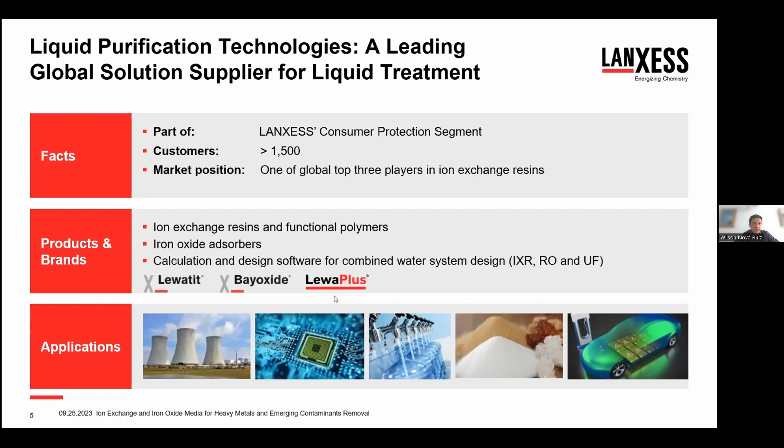I think with that we can go to the next part - let's talk about the problem, what we are dealing with here. Let's start with a very hot topic we've been talking about for the last 5 to 10 years, which is PFAS. PFAS is literally raining these days. We were in a workshop for drinking water a couple weeks ago with EPA - they are going to come out with a new rule we'll talk about, at the end of this year, so next year a lot of people are going to be very busy trying to figure out what to do with this.

According to a couple of studies, it's not safe to drink rainwater anymore as it used to be in the past. Rain and also snow melt cause PFAS and other contaminants to leach through the soil and groundwater, basically contaminating the surface water as well.

Depending on some key risk factors, we need to consider things like precipitation rate, what kind of soil type we have, how much of the contaminant is retained in the soil, and specifically what PFAS species we are dealing with. In the rule, they're basically speaking about 6 different species, but there are more than 200 species being tested these days all over the place. So it's a very complex problem, and it's something we have a solution for as well.

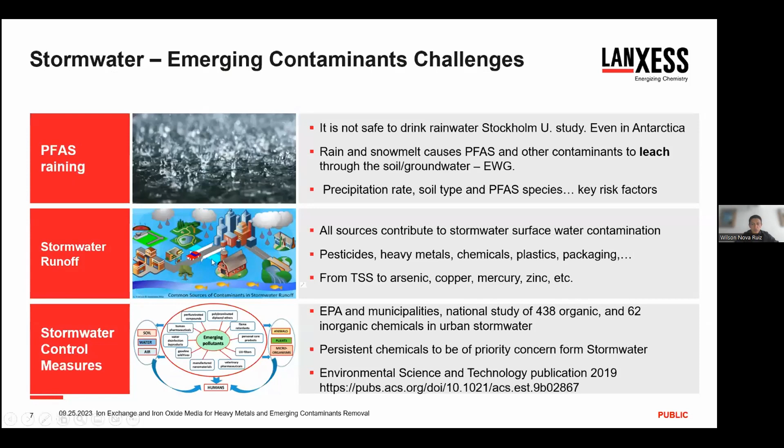But one of the key words here is emerging pollutants or emerging contaminants, because there are some substances of concern for the soil, for the food, for the health of humans and animals and plants, and even the microorganisms. Not only in the water, but then in the soil and even in the air. Like, for example, PFAS is actually something that can contaminate the air as well. So just to have some kind of idea on that.

Sometimes it's a very easy, or let's say simple, treatment system that can take up these contaminants. Like, for example, if you're in a clean neighborhood and you have these kind of retention ponds, you can actually take care of most of the problems.

However, this is not always the case. As we discussed, any stormwater coming from mines, coal plants, or chemical plants can have many different kinds of contaminants. But even this simple retention pond is something that is risky. As you can see, it's not something that you can actually swim in or fish in, but is something that is really like a dangerous or hazardous waste kind of retention site.

This is something that a lot of people are dealing with these days, and we just need to measure and see what is in the contamination. So we say the characterization of the water is the basics to think about any other solution.

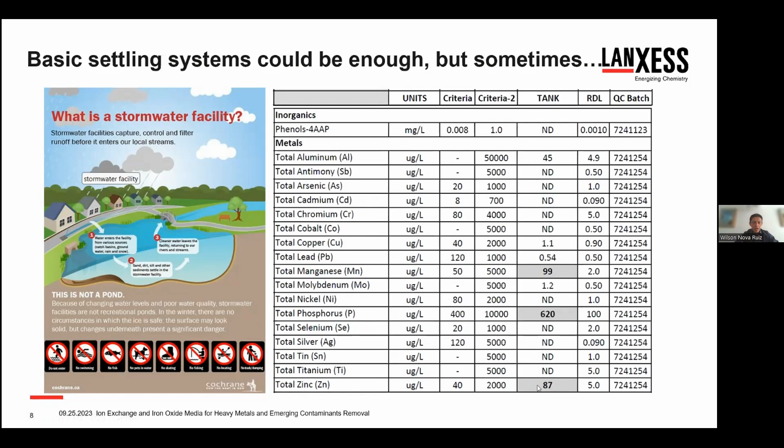And then with that, we can think about what to do because, for example, in ion exchange, we have solutions for manganese. Phosphorus is something that you can actually treat with Bayoxide. And then zinc, there are selective resins that can actually remove the zinc. So there are solutions for every single contaminant. Not all of them, but we have a lot of solutions for that.

Since we are a chemical manufacturer, let me talk a little bit about how we actually sell and what we supply. We supply ion exchange resins. We basically manufacture them. We go from the very raw materials.

We produce the beads, as you can see here, that can be heterodispersed, like in this case, or monodispersed, like in this case. And then these resins that we put in several vessels in order to take care of the contaminants. So the bead, or the ion exchange, is going to have a functional group, usually a type of amine when it's an anion exchange system. Or then we have a polymer matrix, which is usually styrenic most of the times, but we also have acrylic resins. We have some morphology that has to be considered, like gel or macroporous, for example.

Then we also have cross-linking, how much of the structure is actually in the bead able to be, let's say, physically stable over the operation of the ion exchange system, and also how the resin is going to swell and shrink as you load it and regenerate it, depending on the case. That is actually going to determine the operating capacity. I'm talking about the cross-linking still, because the operating capacity is what is actually giving you the capacity of the system in order to take care of the problem.

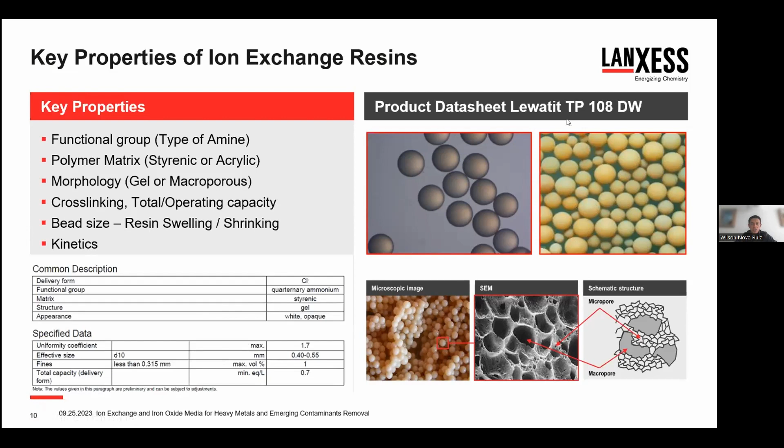So this is some of the basic information we have in the data sheet. And here you can see some of the representation, how these beads are actually formed. And this example is for the TP 108 DW, which is a resin that we sell for PFAS polishing or removal.

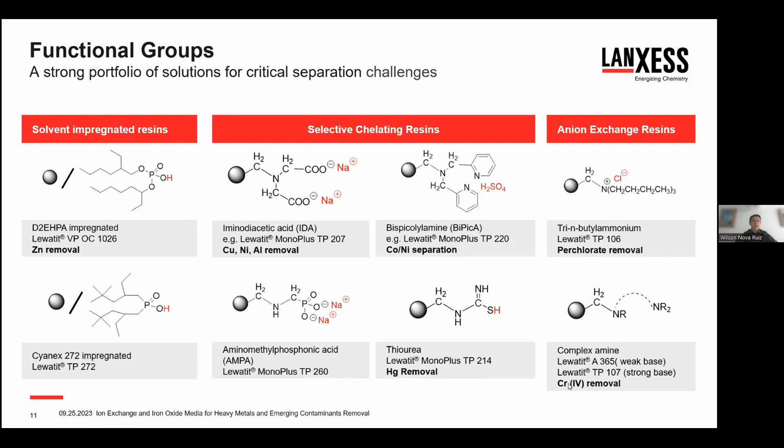From stormwater - this is another way to show how different resins, here in the columns, are going to work for different contaminants in the rows. This is a nice table you can actually use for quick reference. And this is another one, a little bit more detailed on what kind of contaminants you have and what kind of resin you can use.

And of course all of them are different. The good news is that we understand very well each one of them, and we can absolutely provide the necessary support to design the systems and find the right solution for you, depending on what kind of contaminants you are dealing with. There are many different options and problems and challenges that we have a solution for.

Okay, let's talk a little bit about the PFAS regulation. Coming back to the PFAS problem, this is the norm that is going to be issued by the end of this year, and this is kind of confirmed.

EPA is pretty sure they are going to be on time. What I heard a couple of weeks ago is that the draft of the rule is already discussed and is already ready for the administrator review. This is going to happen in the next two months, October and November. Then by December we will have a final rule for PFAS. It's going to be basically taking care of these two, PFOA and PFOS, up to 4 ppt, parts per trillion, or nanograms per liter, which is very, very low.

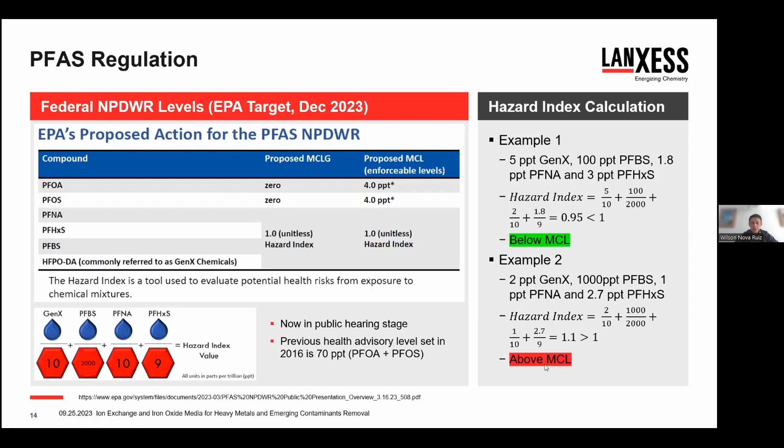So if you get less than 1, then you are below the MCL, you are good to go. But if you are above, then you have to have some kind of treatment in order to reduce and get below the MCL. That's why we want to bring it up, because it's a very hot topic, and we have a couple of solutions for that, both for drinking water and industrial water. Questions about that we can take as well.

A couple of slides just to tell you about a couple of solutions we have. The first one is the Lewatit TP108DW, DW for drinking water. This is the very highly selective PFAS removal resin that we have.

Not recommended for regeneration. This is something that is usually used once through. These resins can go for 100, 200, up to 300,000 bed volumes. So it's a very high capacity and very selective resin for PFAS.

And is approved for drinking water as NSF 61. There is a new product that we just launched a couple months ago, and this is for PFAS as well, but it's a regenerable version. So you can think about wastewater or industrial systems where you need to regenerate the resin because the loading is going to be very high.

Let's say in drinking water, you are always in the range below 100 ppt, and you need to get below 10 ppt. But in industrial cases, you can be in the ppb levels, which is thousands of ppt or thousands of nanograms. And then you need a more robust system with regenerable options, and we have that as well.

There's another one, which is Lewatit MP62WS. It's a weak basic anion, and it's basically for organic species, including PFAS, but also other problems that you may have in the stormwater runoff. And this is a very regenerable resin, very easy to regenerate as well.

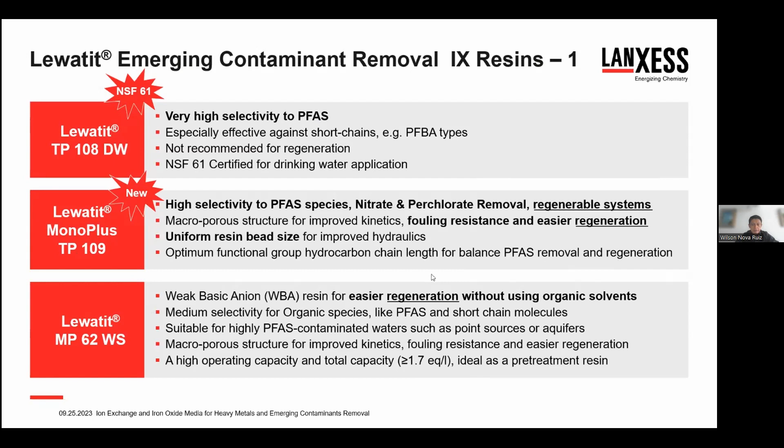It's macroporous, so the structure is a little bit bigger than these two, so that allows the kinetics to be better, and also the regeneration to be more efficient. Capacity is quite high, about 1.7 equivalents per liter. We'll see a couple of examples on those resins as well when you build the systems.

There are 3 more, and with this I stop talking about ion exchange. Basically, TP107 that is very used for chromium removal. We sell that here in the US. Can also be used for PFAS, for bulk PFAS removal. It's an acrylic; the other resins we just discussed were styrenic.

But this one is particularly interesting because it's another polymeric structure, but which provides a much higher capacity, 2.4 equivalents per liter. So it is NSF certified as well for drinking water, but could be used in wastewater, not a problem.

We have the two chelating resins here, TP207 and TP214, and these resins are very, very selective. In this case, for example, you can see you can remove selectively copper, nickel, zinc, cadmium, lead, even chromium and manganese, and also is used for cobalt removal.

Easier regeneration, is macroporous, good capacity, two equivalents per liter, and it's high cross-linking. So it's very robust, very resistant, physically stable, and very resistant to oxidizing.

The TP214 is a very specific one, which is very effective for mercury removal. We sell that in many, many systems, but also for precious metal capturing. So if you happen to have a runoff or a stormwater that is full of these precious metals, you can recover them with the TP214.

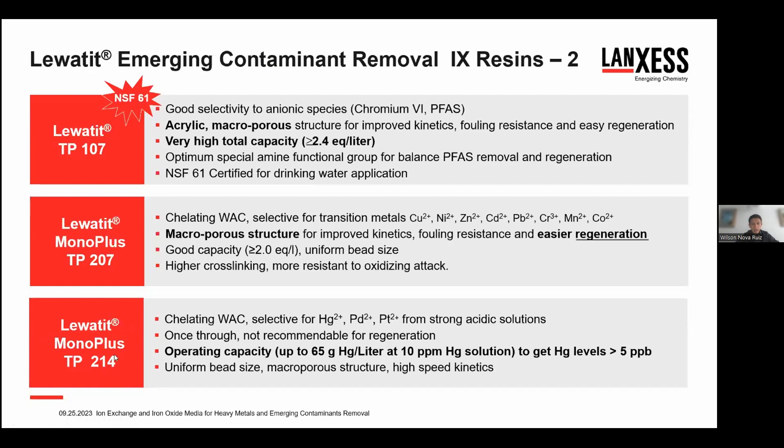Let's talk a little bit about Bayoxide. Bayoxide EIN20 and EIN30 are industrial versions for, let's say, water treatment. And the main target for this media is arsenic.

We sell this resin for arsenic removal globally since many years ago, and we have a big market share on that. But for some contaminants, you can actually use that, like, for example, small concentrations of heavy metals like copper or zinc, and actually phosphorus can be removed with that. Silica is something that we can target with this media as well.

What else? Selenium is something that you can remove with this media. Again, in small, low concentrations, because it's basically a polisher media that we sell in many different areas. As I said, it's basically iron oxide.

If you think about this media, it's basically very similar to granular activated carbon. So whatever you design and you think about how to design with GAC, you can absolutely think in the same way with Bayoxide. It's very similar in terms of design, and we are going to talk about that as well.

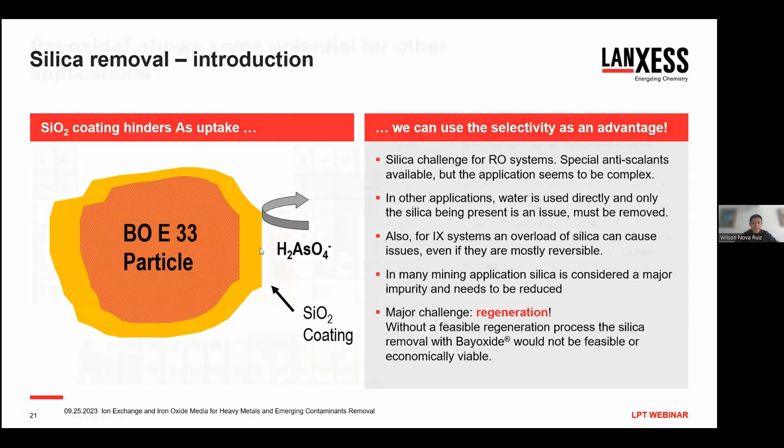And there are a couple of other metals that you can target, again in small concentrations, low concentrations. You can remove them using this media because it's a very good adsorber.

And we can actually use it for household once-through applications, and it's being applied for some cartridges, for example for drinking water. But keep that in mind - if you have a system that is temporary, not high concentration, that needs to clean up, this media can be a very good solution: effective, easy to handle, easy to design, easy to operate.

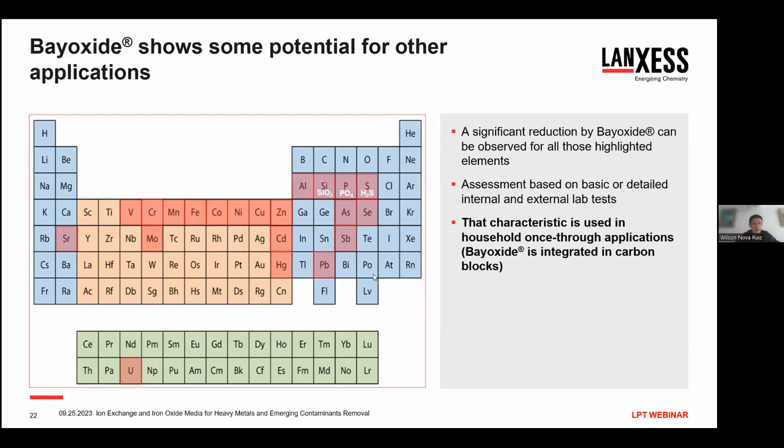Okay, that's more or less what we have for today, but let's talk about how to actually apply those two kinds of media in the solutions for removal.

So usually the resins and ion exchange resins are used in lead-lag systems. Basically the lead is going to take care of the bulk removal, and then you have a polisher or a lag vessel that is going to make sure you're always under the target that you have.

But there are some characteristics of the water that you need to keep in mind. Not any water can be treated that way. Usually you have some kind of pre-treatment in order to make the best out of the ion exchange. And of course, we have several studies for specific substances.

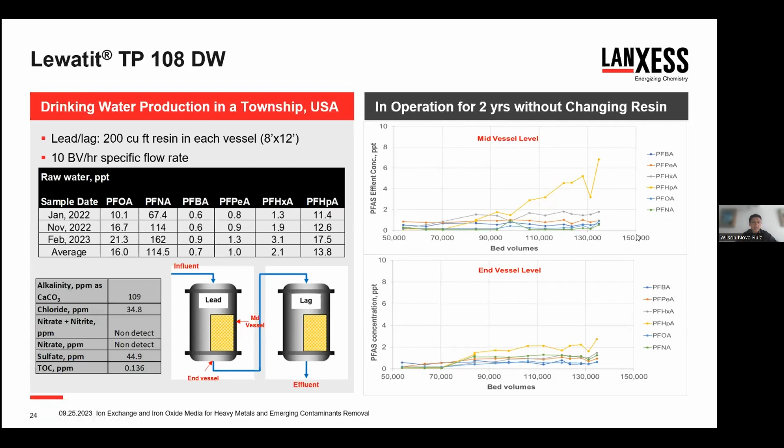For example, in this case it's based on the TP108DW for PFAS. And as I said, you can run for a very, very long time - for example, this system has been in operation for 2 years without changing the resin. You can go 130, 150, 200,000 bed volumes with no issue, because the capacity and selectivity of this resin is very good for that.

This is another example. So you may have a system that removes a bulk of the contamination in the first vessel, and then you change the resin in the second, in the lag, in order to take care of something that is more difficult to capture. In this case, the MP62WS is going to take care of one part of the problem, and then the second vessel takes care of the other part that is not retained by the lead vessel. So that's something you can actually configure as well.

This is, for example, a real example for a chemical plant in Europe. This case was exactly about PFAS substances like PFBS and PFBA. And you see the characteristics of the water - 20 bed volumes an hour you can run.

This is very important to say - the empty bed contact time is usually 2 to 3 minutes, not more than that. So it's very, very quick with very high kinetics. And then regeneration can be done as well with caustic soda, as we mentioned.

So very interesting system. And then the system can be a little bit more complicated. If you have something that is very heavily contaminated, then you need to make a pre-treatment - you need to put some GAC in place in order to remove organics and some of the PFAS.

And I'll continue talking about PFAS in this system. Then MP62 can take care of this problem. In this case, you see there are 3 vessels in series in the system. And after that, you go to a polishing system.

And why is that? Why is it so complex? Because the concentration is very high. So in order to get from the very high concentration to something that you can discharge, sometimes you require different stages in treatment. And this is something we can help you to design and decide what to do in order to best take care of the problem.

All right, same kind of flow - 20 cubic meters an hour. The flow rate is here.

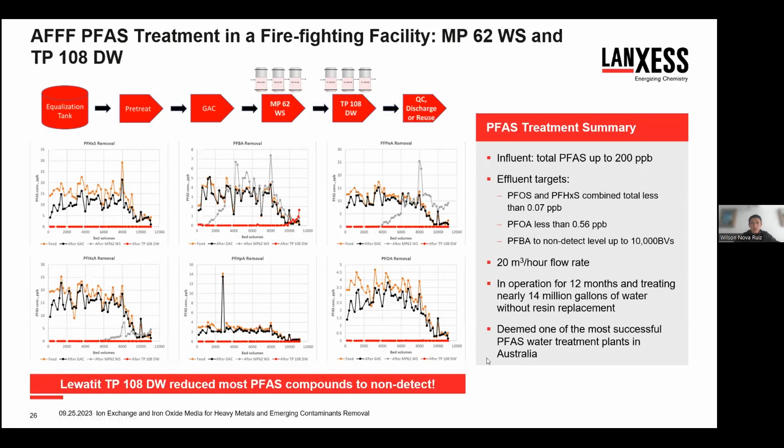And this is an actual system that we have running right now in Australia. But we have systems like that also in the Americas region.

Another kind of problem you can have is natural organic matter. Of course, the runoff from stormwater is going to bring everything that is on the surface, and sometimes organics is a big problem. There is a resin you can use. The usual recommendation for organics is GAC, but if you need to take care of something really specifically and selectively, then this Lewatit S5128 is a solution you can try. You can get down to safe drinking water limits below 5 ppm in natural organic matter, and you can regenerate that resin with a double step using sodium chloride, and sodium sulfate could also be used.

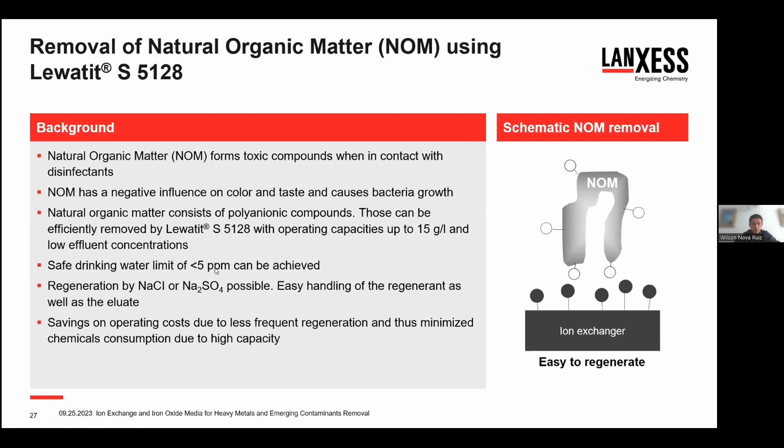But this is just an example—it could be organics, could be inorganics, could be very low concentration, could also be very high. For example, in this case we are talking ppm. In the PFAS systems, we were talking ppt. So you can have different ranges depending on what the problem is.

So, in general, operational guidelines for ion exchange: basically keep suspended solids very low, because otherwise they are going to be retained in the column, and then you're not going to have the most efficient operation of the ion exchange. Keep pressure drop low.

Free chlorine can sometimes oxidize the resin, so keep it low as well. Any oxidants, you want to avoid high concentrations, because otherwise they're going to oxidize the resin. TOC is usually something we want to keep low as well, less than 1 ppm, because it can be retained by the resin, and then it's going to take some operating capacity from the resin.

Oil and greases are not tolerable—you really need to take care of them ahead of time. And heavy metals, of course, keep them down, because otherwise the resin is going to capture them. So it depends on what you're trying to capture.

Pre-treatment is something that's very important. 10 to 20 bed volumes an hour, as I said, 2 to 3 minutes—you can actually operate with that as an empty bed contact time. The vessels could be 8 foot, 12 foot diameter. Cross-sectional linear velocity is a minimum of 5 meters per hour.

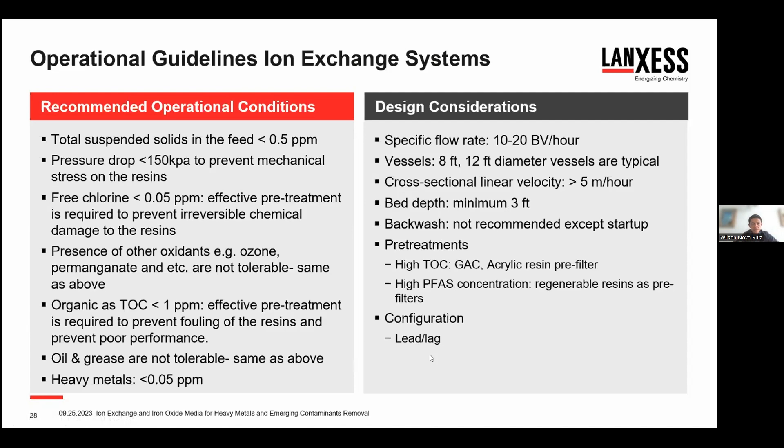What else? The configuration, as we explained, is usually lead-lag, but could also be what we call merry-go-round, which is basically three vessels in place. All right, this is all about the configuration of the ion exchange.

Let's talk a little bit about the configuration for Bayoxide. This is very easy, as we discussed—it's something you can handle like you handle GAC. If you have any system and you want to, let's say, remove arsenic very selectively, you can go with a very similar system.

The difference is that, for example, the empty-bed contact time in this case is 3 minutes. The empty-bed contact time for GAC usually is between 10 to 20 minutes. So these media are much more efficient than GAC for sure.

Other than that, you want to keep the pressure drop lower. Even, for example, in ion exchange it used to be almost 2 bars. In this case, we want to keep it below 0.7, because the media is fragile, and if you put too much pressure, it's going to crush it. The bed depth in this case is 0.7 to 1 meters, so more or less the same as we discussed for ion exchange.

Cross flow velocity is, understandably, a little bit lower. In ion exchange we talked about 5 meters per hour; in this case it's 2.5. Cross flow velocity 20 meters per hour, and the freeboard is usually 50%. This is something we didn't discuss in ion exchange, but usually in ion exchange we can have 80 to 100% freeboard, because when you backwash, you need to expand the bed very much in order to remove fines. So you can probably go up to 100% in some cases.

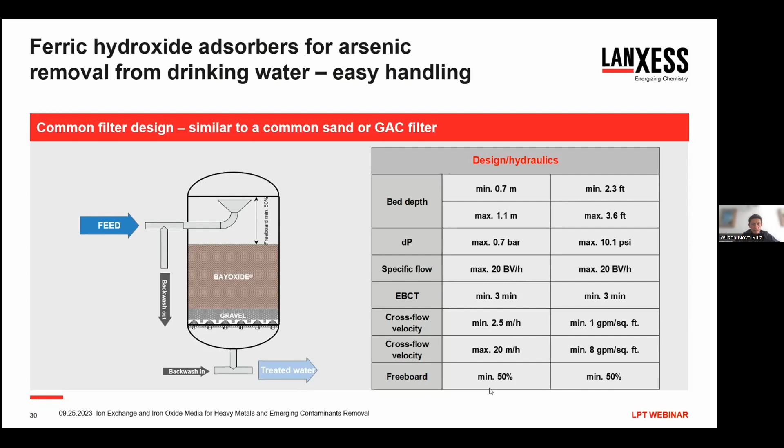Some of the steps you need before the Bayoxide starts to work is filtering. We need a pre-treatment to make sure the water is clean and that you can selectively remove, for example in this case, arsenic or any kind of contaminant. Arsenic is the main target, then phosphate is the second target. We also want to keep an eye on silica because it's going to load, cover, or coat the Bayoxide. So these three are the targets in this case, and because of that, the pre-treatment is very important.

A couple of things here: if your target is arsenic, the best operation is with arsenic 5. So if you have indication of arsenic 3, you want to oxidize it with something like chlorine to make sure the arsenic is in state 5. Also, some pH adjustment is needed, keeping the pH in a neutral range, so you can have a pretreatment for that as well.

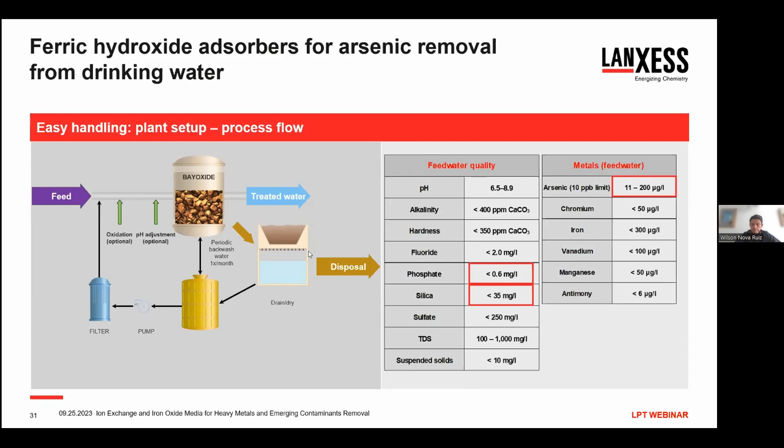There are many different configurations you can try, with lead-lag being the main system used. But sometimes you can do some kind of bypass, removing in one vessel and then blending with a non-treated stream if regulations allow. It's more or less the same as ion exchange, lead-lag configuration, but you can also do a merry-go-round, basically three vessels in series: one for lead bulk removal, then lag just to polish, and a last one as an extra polisher. So it's very similar to ion exchange, but also very similar to GAC, as I mentioned.

Depending on what you're removing and how much contaminant, you can play with those configurations to make the most of the media and get the longer performance out of it.

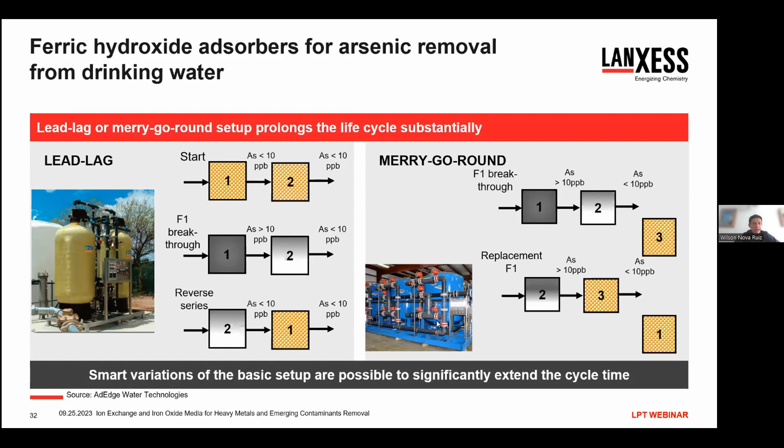So in summary, it has a long track record. This is something that has been used, and is being used, for drinking water arsenic removal. It's very easy to install, not different in design from GAC or ion exchange, with basic designs. We can help you design a system if needed. There are many smart options you can play with, and we have a lot of experience with that, so we can guide you in selecting the best arrangement.

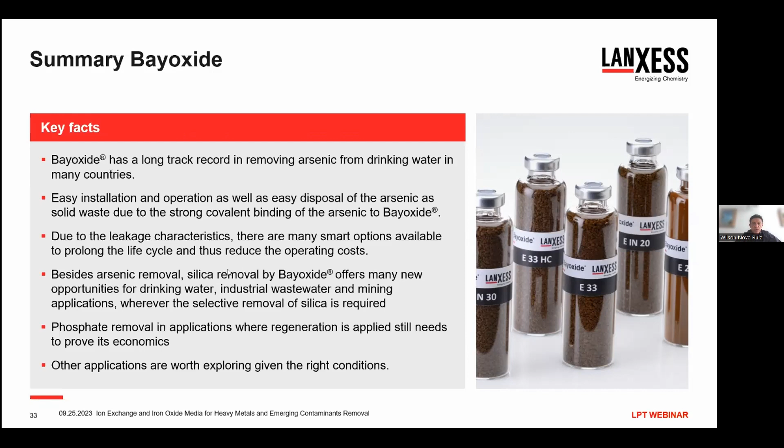Besides arsenic, this is used for silica removal, phosphate removal, and also some other emerging contaminants like heavy metals. This is being used, for example, in remediation projects in Canada using Bayoxide for heavy metal treatment. So it's a good option, available in two versions, one for drinking water, one for industrial and wastewater.

With the flow rate, composition, and pH, we can design a system. If you give us this information, we are very happy to provide a basic design for Bayoxide. Three minutes empty bed contact time is usually the rule, and the pressure drop is less than 0.7 bar. We really need to know the target concentrations by contaminant to see the actual operating capacity of the system. We're always very concerned about the final disposal, how you plan to dispose of the loaded media, depending on the contaminant being removed. Is it going to be a temporary treatment or a permanent one? That also influences the design itself, how much media and how big the system has to be. Lead-lag is usually the configuration used, but there could be variations to take better advantage of the media. The freeboard and backwashing is something we really want to consider, and we can absolutely help with that as well.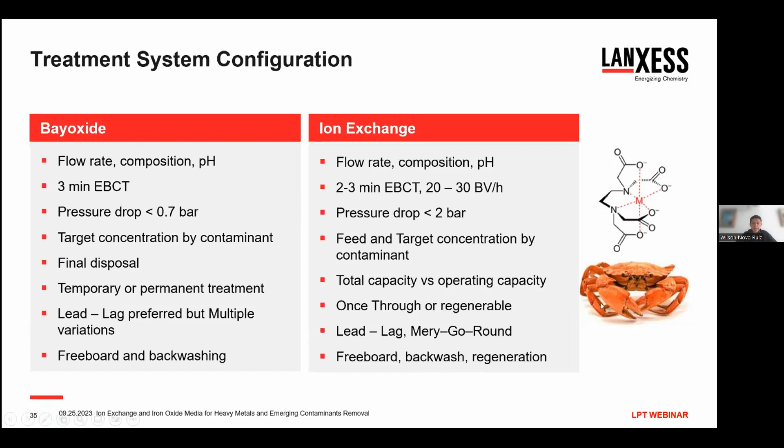And it's just a figure of a chelating resin trying to capture a metal in the middle. You can see it looks like a crab.

So in summary, Lanxess has more than 80 years in this business for ion exchange. We really are a leader in this market. We know very well the resins, how they operate, how they work better, and we have a lot of experience with purification and drinking water systems, and also industrial and even complicated waters, many industrial systems.

German standards used to say that quality is something that we really have in the top of our mind. As you see in the slogan, most of the slogans of our products in Lanxess in general have the word quality, because we really believe that's the driver for our business.

And of course, we constantly train and learn about the applications, the products, new products, new developments, and we really have very high technically expert people that are going to help you with the solutions for any problem.